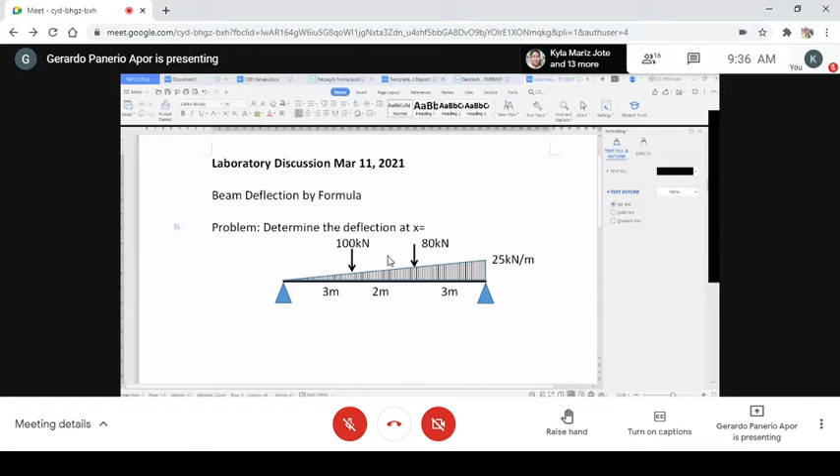Okay, so if we are going to look for the deflection, first I have the problem here: determine the span deflection, or the deflection at x equals to 5 meters from left support.

EI is constant. Okay, just use the table of the formula, the deflection formula in the table. I don't know what's table. Okay.

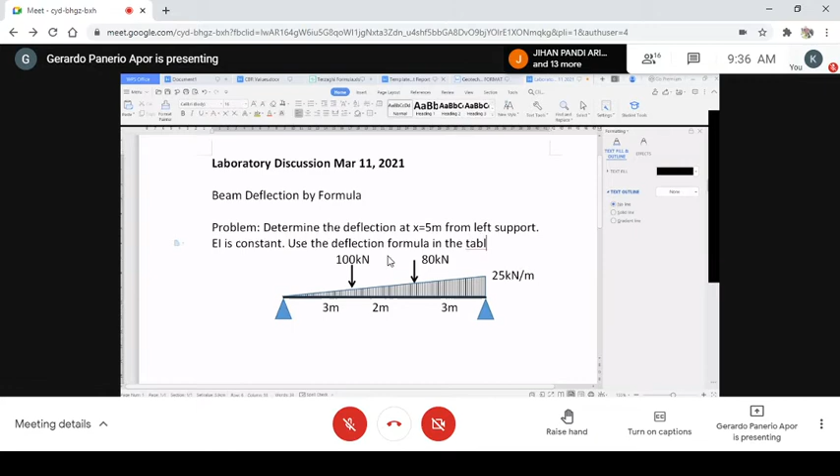So that is the problem. So if we are going to look for the x equals to 5, so maybe I will just first determine the deflection here. So may line nga kuhaan. So kinagida po ma-redali, no? Just see it like that.

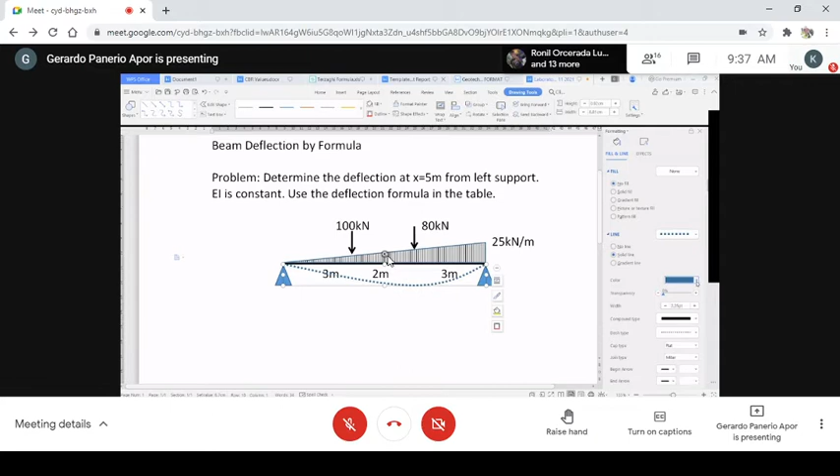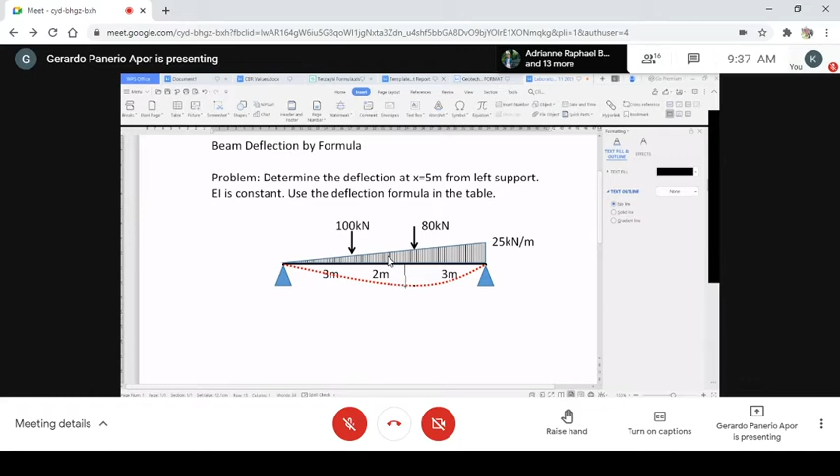Okay, I will choose the line with the color. Okay, so at x equals to 5 meters, it's somewhere here, no? This is 4 meter at the midspan, so maybe somewhere here, that's it. Okay, this is the point, no? Where your y, so we have solution.

Okay, so first we are going to divide this. There are 3 types of loading, no? Because in the table, there is no formula for two combined loads, no? So we handle each one separately. So this concentrated load applied on the 8 meter beam, there are two classical loading cases here, and the third is this uniformly varying load.

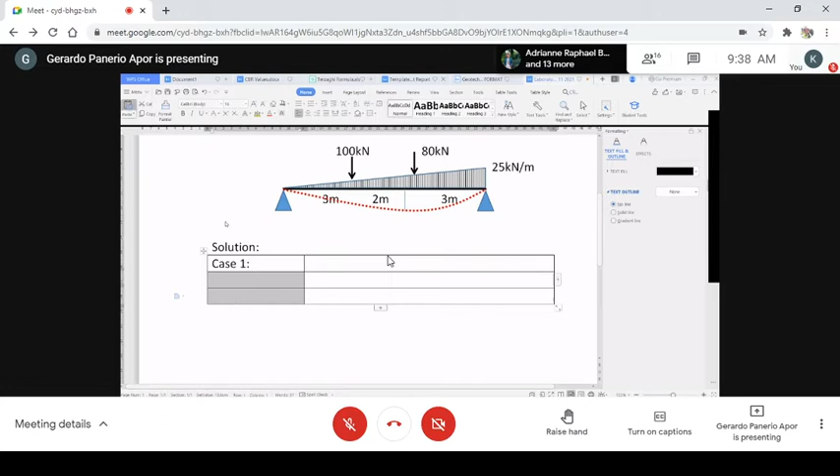So in my solution, I will prepare a table made up of three columns: one for, let's say, case one - I just call them case one. Okay, the second is case two, but I just copy them now, case two and case three.

Okay, so this one calculation, I will use the, okay, I am going to look for formula in the table. So, maybe I should call someone, in case anyone there is asleep. Okay, okay. Ay, wala ko ikuan, nag-audio. Is the audio clear for you? Yes, sir. Okay, so thank you.

So I will search in the internet beam deflection, say beam deflection. Let me put, okay, formula, no? Formula, beam deflection formula. Okay.

And then, so I don't take too long, I'll just use this image. Image of this, you can see here. So this is something you can find in most, in every book, no? We have here deflection for this. So, I found so many, and then, here it is, no? So, here it is.

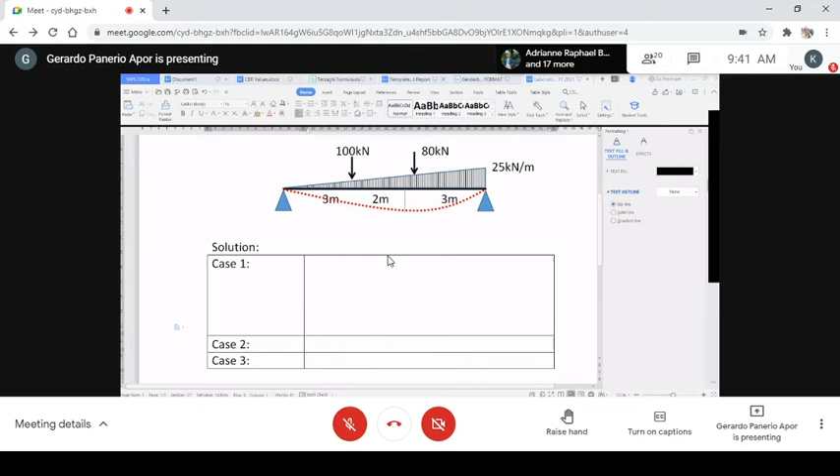So, this new case, actually we can use this. No? This case, you can use this for the first and the second case. Okay, so this can be used here, case 1 is like that, no? For case 2, we can use the same, no? We can use the same. Okay, yeah, for case 3, this is what we'll follow for case 3. Where is it? Yeah, for case 3 it is this one.

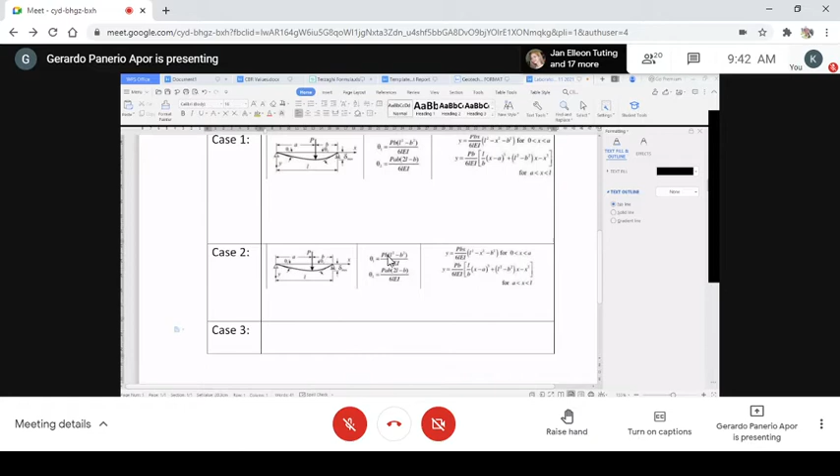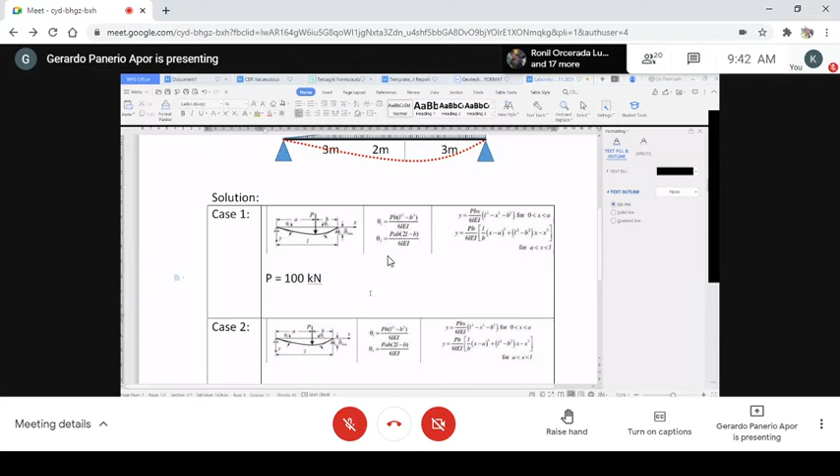Okay, we can use this for case 3. So for case 1, we just use P equals to 100, but going down, we just use the positive value. We know that it's going down, so we just use 100. But if you want the formula to determine it's negative, you can put it negative, knowing that it's going down, so you can use that value. Before all that, since it's going down, as long as you use positive, you can use that. And then here A is equal to

3 meters, and then B is equal to 5 meters, and then L is equal to 8 meters. Now, X equals to 5 meters, Y is equal to Y5 meters. I will make this as a subscript, 5 meters, with subscript.

Now we have a case here wherein A is lesser than X. So you can use the second equation, since there are two equations for Y, this one and the second one. But our A here is 3 meters while our X is 5, so we have to use equation 2.

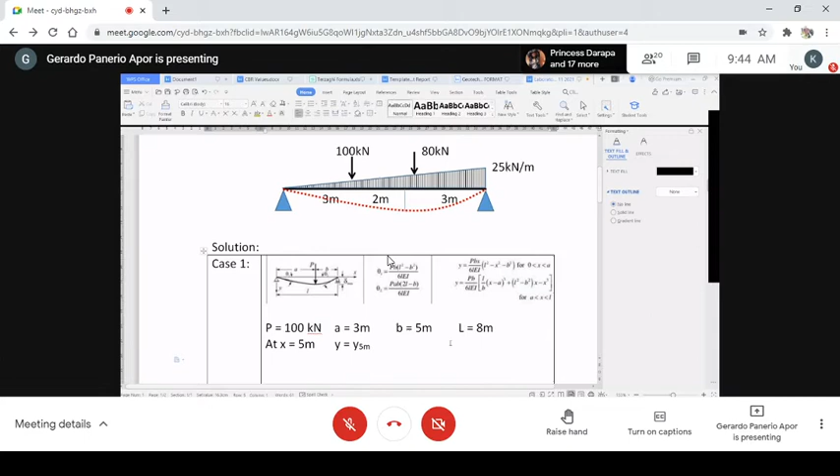So Y here will become Y5 meters. We substitute it and then I will put EI on the other side so it will not interfere with my equation. That means I multiply both sides by EI, so on the other side it will become the load in kilonewton.

So you have 100 for the P, and for B that's 5 meters. And then next is X which is 5 also. So you have that, and then the denominator you'll have 6, then divided by 8. Or we multiply 6 times 8. How much is 6 times 8?

Ay, I fell down there. Calculate it. Okay, calculator. Wala. So 6 times 8. How much is 6 times 8, class? 42? 42, class? 6 times 8. 48, sir. 48? Okay, thank you for that.

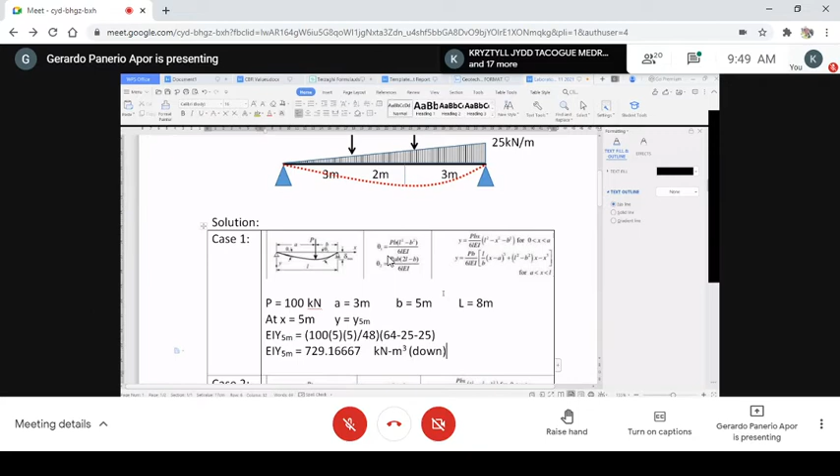729.16667. Now, you can also put here a note that this is downward, down. Okay, you mark it down. But if you don't mark it down, you use negative P, so it becomes negative. So you don't need to use absolute value. So this one is absolute value, knowing that you are sure it's really going down, so you just mark it down. So, for the second case, okay, is there any question about the first case?

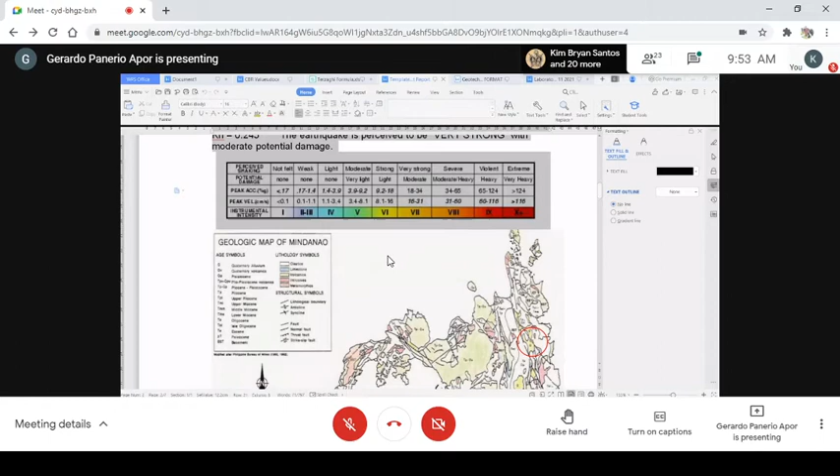Into 5, is this really into 5? Yeah, into 5 is still going down. We have 64 minus 25 minus 9, times 80 times 15 divided by 48.

750, again 80 times 15 divided by 48, times 64 minus 25 minus 9. Yeah, 750 down. Okay, but this is only for the 80 kilonewton, while for the 100 kilonewton, you have 729.1667. So for the other one, because you notice here in our load diagram, we have three types of loading.

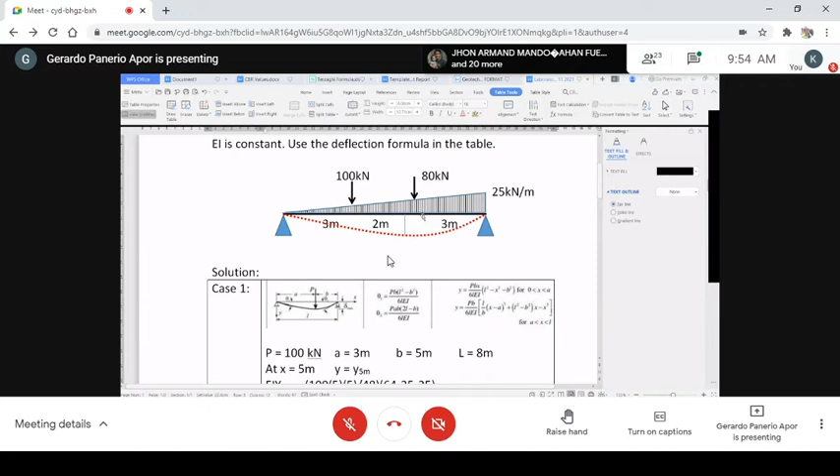Two of which are concentrated loads, the 100 and the 80 kilonewton, and they have a specific point of application. You also have a uniformly varying load. Now the uniformly varying load is increasing. Here in the figure we have also increasing.

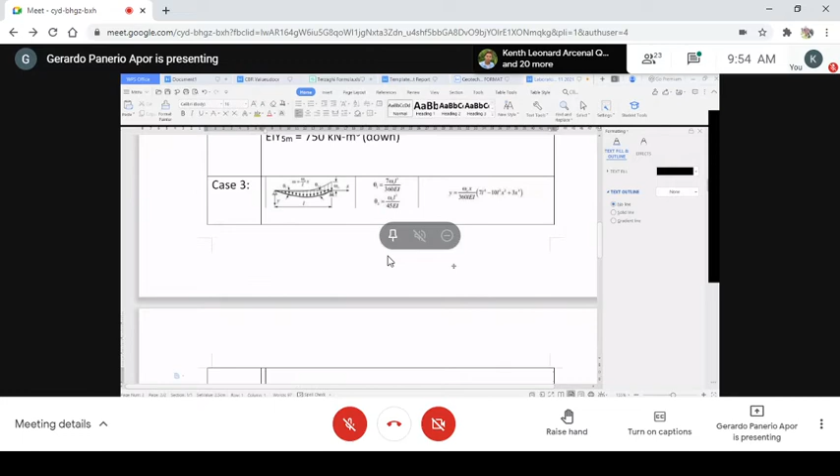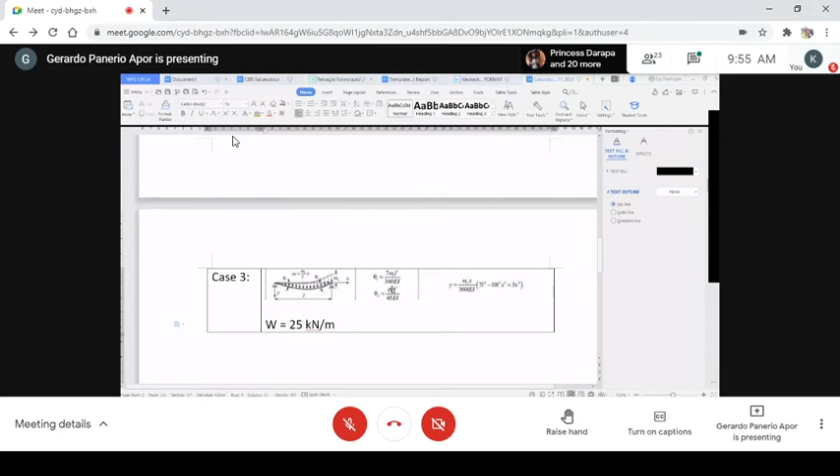Okay, so we have also an equation in terms of x. So here we will define what will be the value of W, the W maximum. And that is equal to, here in our figure, 25 kilonewton per meter, and nothing else. L is equal to 8 meters.

I think that's fine. So at x equals 5 meters, we have the value of y equals y at 5 meters. Then we compute for EI y at 5m, I'll make this into a subscript, y, more subscript.

Okay, so then I write the equation. First, the one outside the parenthesis, you have the 25 kilonewton per meter multiplied by x of 5. So you'll have kilonewton divided by 360, 360 times L is 360 times 8, that is 2,880. Now EI is already transposed to the other side.

Then I have the parenthesis inside the parenthesis. The unit outside here is kilonewton per meter, multiplied by 1, so still kilonewton per meter. Inside you have L to the fourth, so the unit here is kilonewton per meter multiplied by meter to the fourth, giving kilonewton meter cubed. Okay, that's the resulting unit.

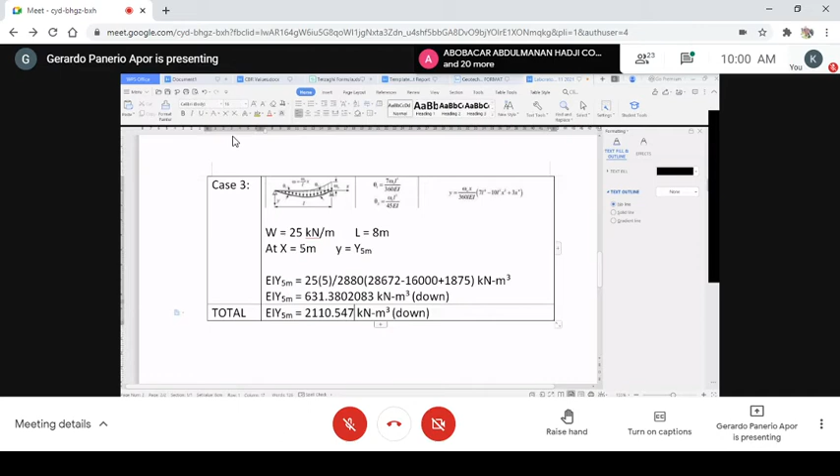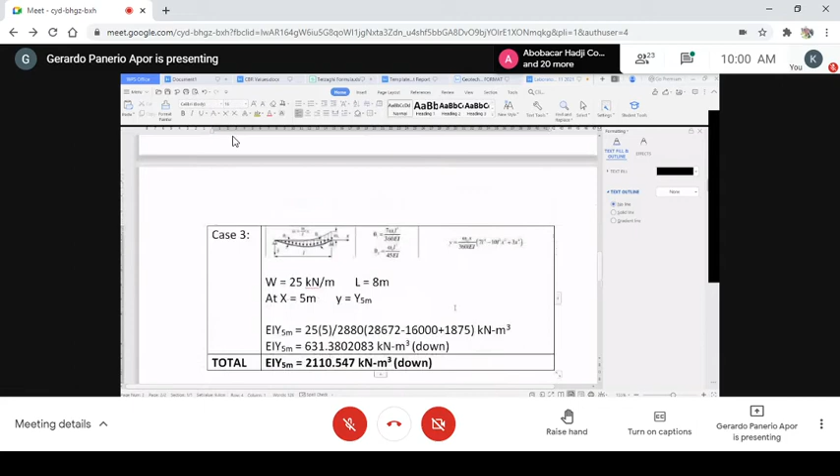Okay, so let's answer this one. Sir, I have a question. Yes, ask. Okay, this is about case 1. Okay, let's go to case 1.

Sir, which equation should we use? Is it equation 1? Because the last statement says for 0, x is lesser than a. Now let's check what is our value of x. X is 5, and that's correct. X is greater than a.

Okay, so equation 2, because we used the wrong one. That's correct, right? So everybody, is that okay? Since we were all wrong, someone noticed the mistake in what we used. 0x is greater than a. So is that what you mean, that our equation was wrong? Yes, sir, because if we substitute a here as 3 and x as 5, this is not true. So here, 3 is less than x. So equation 2 is correct, so we can use equation 2.

Okay, so I will first evaluate this. So x minus a, what will be x minus a? 5 minus 3 is 2, right? This x minus a, how much is it? X minus a is 2. 2 raised to the power of 3.

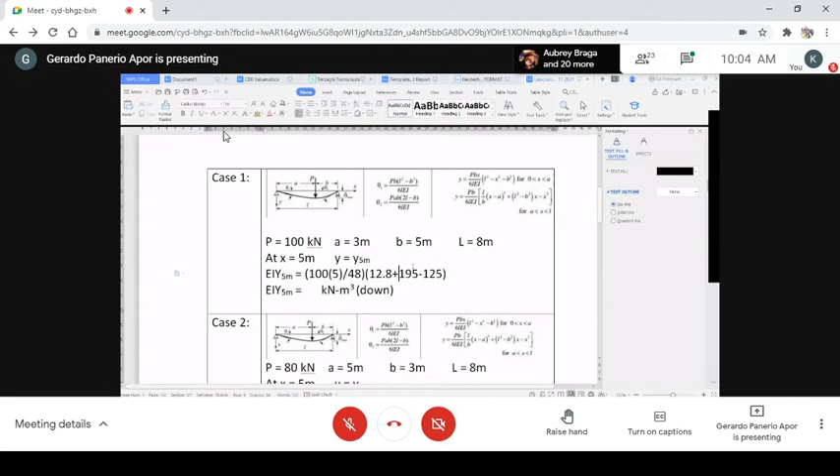Okay, so we have this addition, sir, correct? X is 5, minus A, that's 2, raised to 3, that's 8, times 8 divided by 5, so 12.8, minus 195, minus... plus, right? Plus, okay. 12.8 plus 195 minus 125. You have a positive number times 500 divided by 48, so you have 862.5.

That's 862.5. Okay, how about for case number 2? Is our formula correct? I think it's okay. So A of x equals to, so you can use both equations, but here we use the first equation.

So the total deflection is plus 750 plus 631.08, which equals 2243.58. That is it.

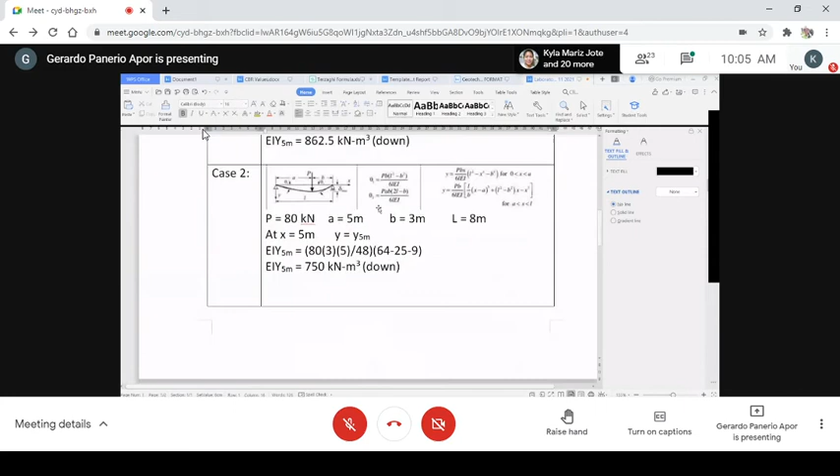So first is the deflection class. So what I did is I divided them into 3 different loads. I made sure that each load case matches the formula table so you can use it. So case 1, case 2, in the table, and also case 3.

So we evaluate the deflection at x equals to 5 meters. And since we're looking for the deflection from the 3 loadings, what you will do is use the principle of superposition, just add the deflection of each type of load. So the total deflection will be 2243.58. Now it seems to be a big number, but in actual it's not, because EI is a very big number, so if you divide that by EI, it will have a unit of meter.

So, like for example, I will add a question. Okay, I will add a question: if E is equal to 25 gigapascal. This 25 gigapascal is typical of reinforced concrete.

So how about if E is equals to 25 GPa? The GPa means gigapascal. That is a typical value for modulus of elasticity of concrete. And let us put the size of the beam, size is 250 by 600 mm. So this is a typical beam that you will see in any building, 250 by 600. So from it, you can compute the I.

Now I is equals to B, D cubed over 12. That's the formula for I, B cubed over 12, about the strong axis. So I will just put maybe IX, and I'll make that a subscript. Okay, that means you use the beam in this figure.

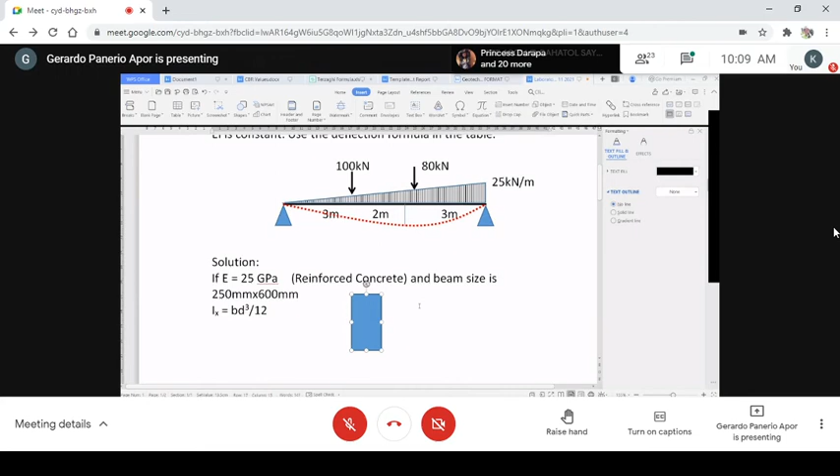Okay, use the beam in this figure. So the width is 250, the depth is 600. I will continue, so I can compute my I.

That equals 250 times D, which is 600. I will do that 3 times, 600 divided by 12. The unit here is raised to the fourth power - into the fourth, subscript, superscript.

So if I'm going to determine 600 raised to the power 3 times 250 divided by 12, I have 4.5, times 10 to the 9. That's the moment of inertia - quite large.

So if you compute for the EI, the gigapascal is also 25 kilonewton. This is mm to the fourth. Millimeter is given, kilonewton per mm squared - that's the E.

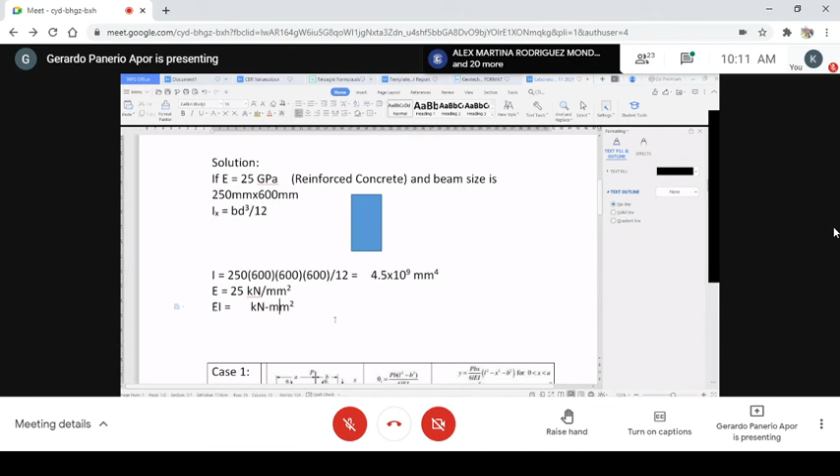So the computation is you have 4.5 times 25, so you'll have 112.5. Now if we convert this to meter squared, we can still do it.

We just divide this by 10 to the 6. So we just divide it by 1 million, so it becomes times 10 to the cube again, but the unit is now meter squared.

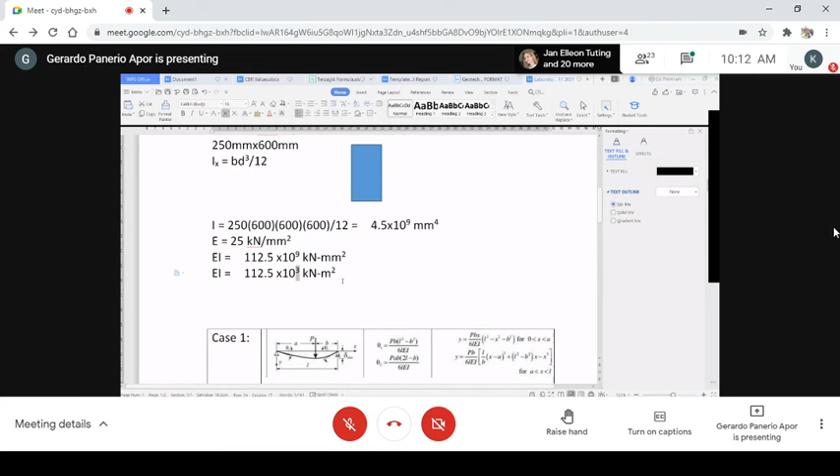So if that is your EI, the question is to calculate the deflection - the magnitude of deflection.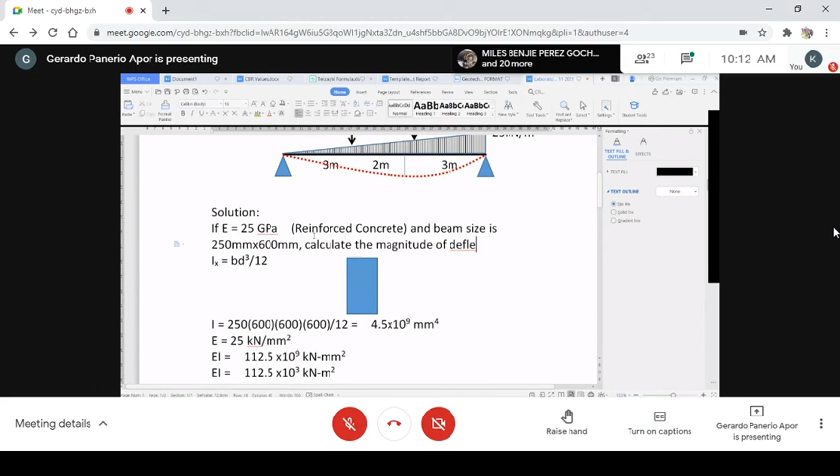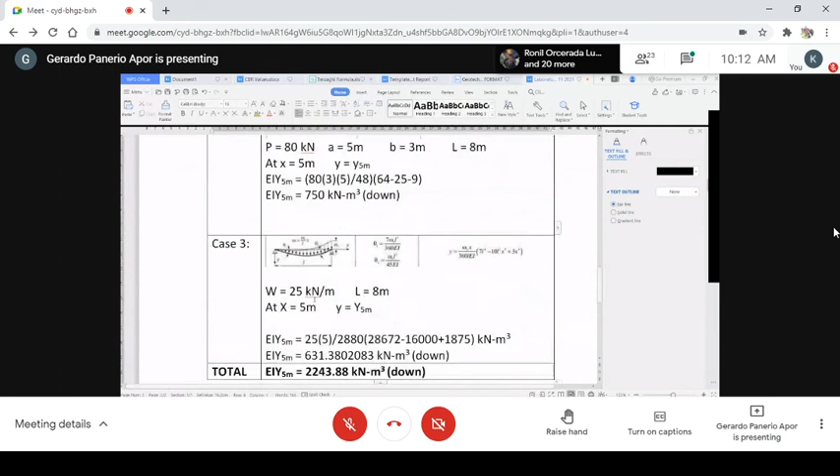So EI equals that. If we substitute it here, we have 112.5 times 10 to the cube kilonewton meter squared at 5 meters, which equals the subscript, superscript, equal to 2243.88 kilonewton meter cube.

So you will have y in meters. 2243.88 divided by 112.5 is equal to 0.0199 meter. Or if you convert meters into millimeters, just multiply by 1,000.

So you'll have a deflection of 19.9 millimeters. That is the answer. I will save this.

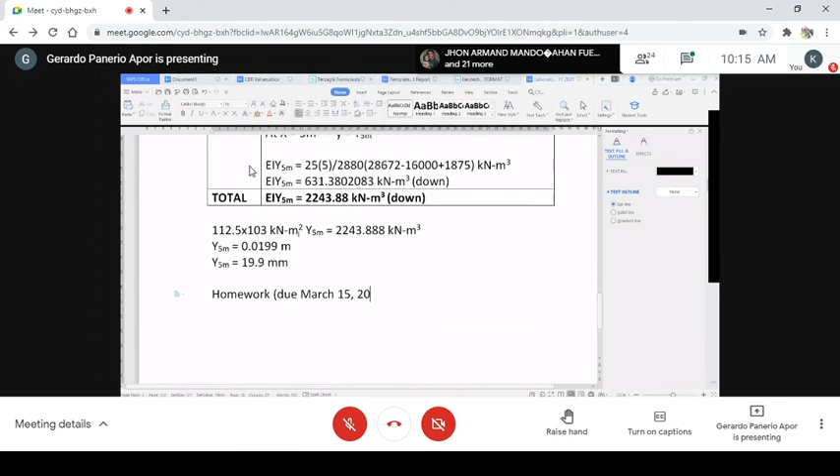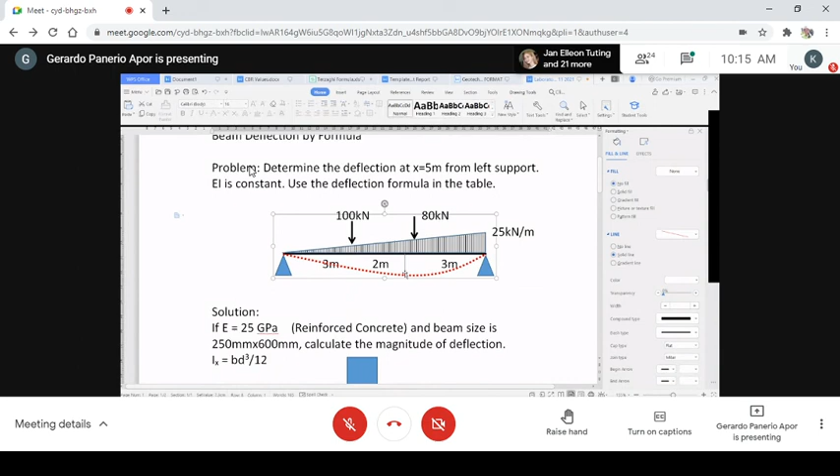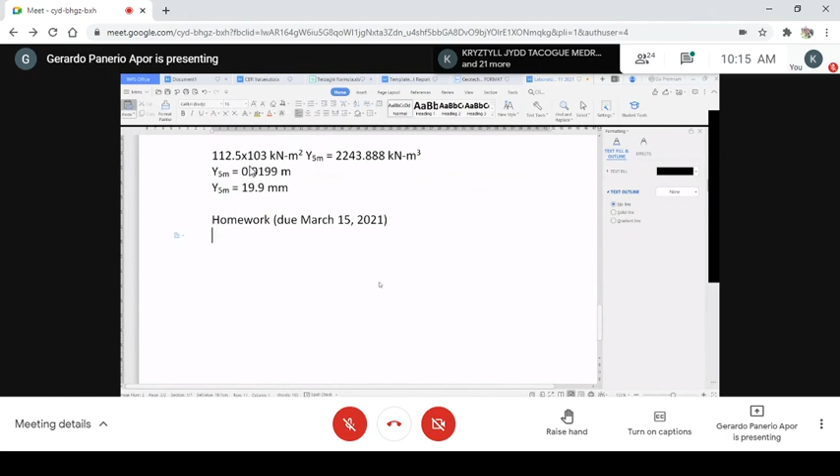So this problem I will have you copy - this is your homework. The values given are 80, 100, and 20, with X equals 6 meters.

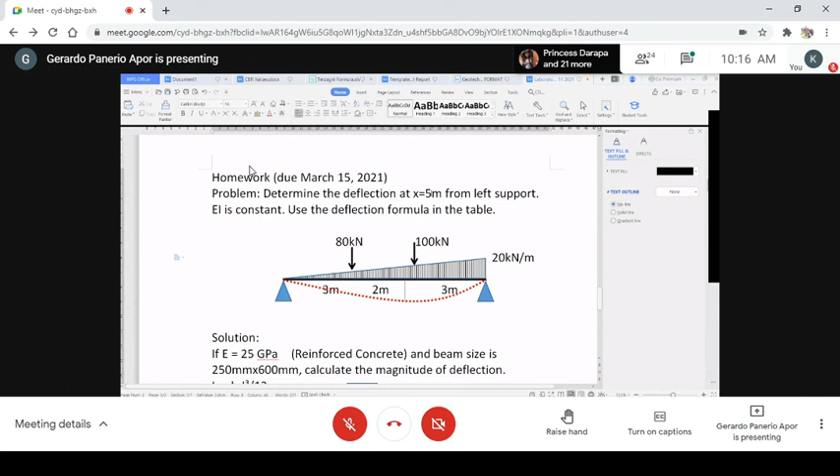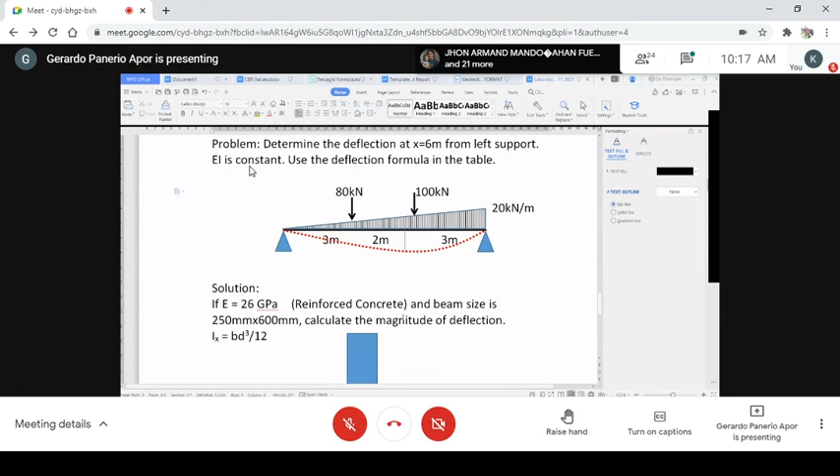Okay class, so do you have any question about my solution?